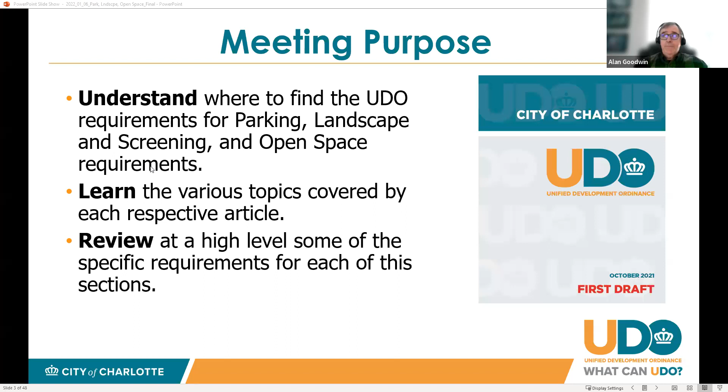So let's get right into the material now. We'll start out with parking. The parking requirements are found in Article 19 of the UDO. It's in Part 8, which is still part of the zoning standards section of the UDO. In Article 19, you'll find the various parking standards, and you can see a screenshot there of the table of contents of the UDO. This is where you'll be able to look and find what you're looking for, hopefully, in the entire UDO. Just start out with the table of contents right at the beginning.

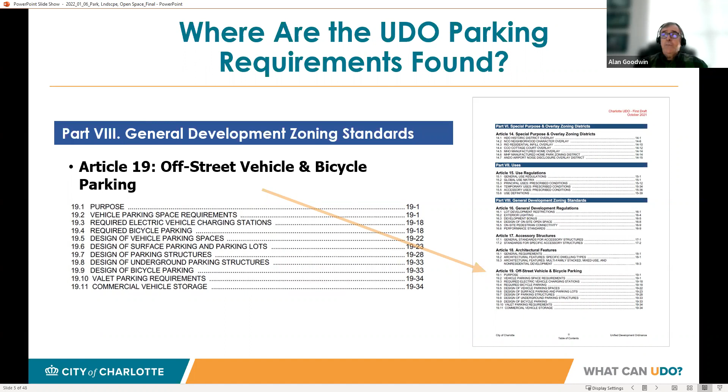So the parking requirements in the UDO are using a three-tier system that's based on zoning districts. Before we dig into that, I thought it would be helpful to just review what the proposed zoning districts are in the UDO. If you're not familiar with them, if you haven't been to any of our other meetings or conversations, this may be new to you. We have divided the proposed zoning districts into three general categories: neighborhood, employment, and centers, and they're each found in a different part of the UDO, either Part 3, Part 4, or Part 5.

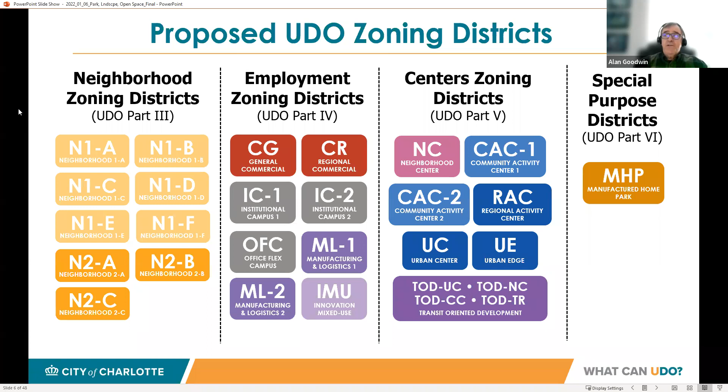They are Neighborhood 1 and Neighborhood 2 zoning districts, and then in the employment districts, there are commercial, campus, manufacturing and logistics, and innovation mixed use. And then our centers districts have neighborhood centers, community activity centers, regional centers, transit-oriented development, and then we also have a manufactured home park district. So that's just an overview.

Now, the parking requirements in the UDO, I mentioned we're using a three-tier system. This is something new for us, where according to zoning district, you would fall into either tier 1, tier 2, or tier 3. They are different, and we'll go over the differences and what's included in each of those three tiers in the upcoming slides.

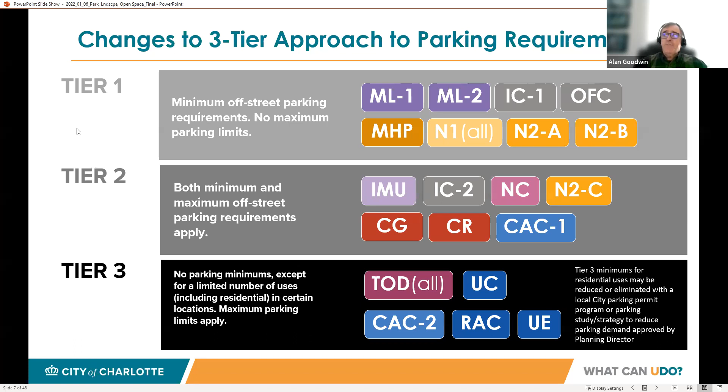So tier 1, which you can think of as our most auto-oriented, least walkable districts as a rule. The districts in here would be the manufacturing and logistics 1 and 2, the institutional campus 1, the office flex campus, the manufactured home park district, all of our neighborhood 1 districts, and our neighborhood 2A and 2B districts.

For these tier 1 districts, there will be a minimum parking requirement for off-street parking, but no parking maximums. And typically you can see what some of those minimum parking requirements would be. For example, for a single family home, it would be 2 spaces. For a manufactured home, it would be 1 per unit and so forth.

A typical non-residential minimum parking would be 1 space per 500 square feet of floor area of that use, but that's just a broad generality. Different uses would have different minimum parking requirements based on their nature. For example, some things like a car wash may not have a minimum parking requirement.

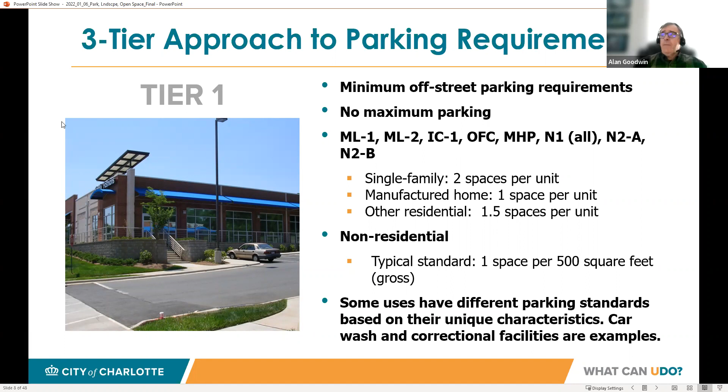Our tier 2 zoning districts would be the innovation mixed use, the institutional campus 2, neighborhood center, the neighborhood 2C district, our 2 commercial districts, and our community activity center 1. Tier 2 has both a minimum parking and a maximum parking standard.

Alan, I think we lost you. No, excuse me, I had to stifle a cough and get something to drink. No worries.

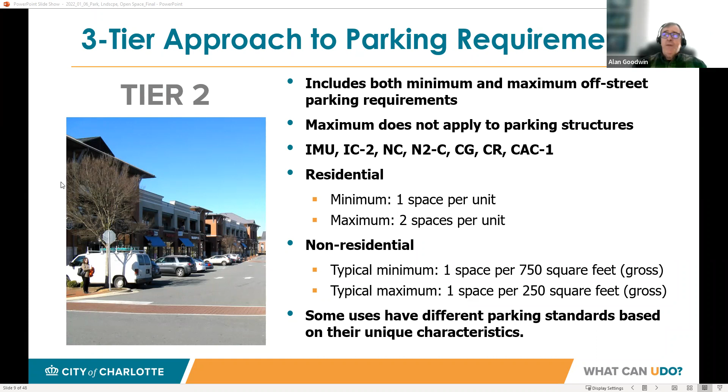So as I was saying, in the tier 2 districts, you would have both a minimum and a maximum requirement. And then finally in our tier 3, which tend to be our most urban and most walkable areas, the zoning districts in tier 3 are all of our transit-oriented development districts, our urban center, our urban edge, our community activity center 2 district, and the regional activity center.

And generally speaking, uses in the tier 3 districts will have no minimum parking requirements, but rather instead they will have maximum parking requirements. There is an exception to that. There would be minimum parking requirements for certain uses if you're within 200 feet of neighborhood 1 zoning.

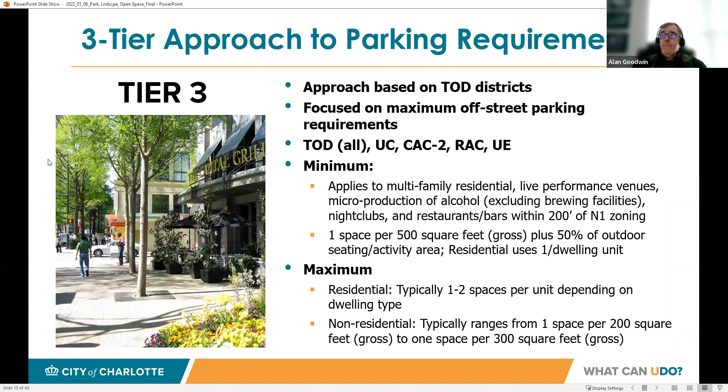And that would be things like multifamily residential or live performance venues, nightclubs, breweries, that kind of thing that are apt to generate parking demand in close proximity to lower density residential neighborhoods. Other standards in the parking are how parking spaces are calculated. It's based on the use, generally speaking.

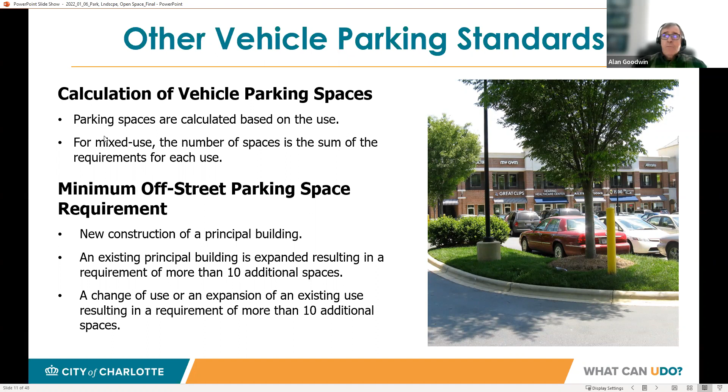And when minimum parking spaces are required, that is either with the new construction of a principal building, or if an existing building is expanded that requires more than 10 additional parking spaces, or a change of use resulting in a requirement for more than 10 additional parking spaces.

Some parking spaces are exempt from parking maximums, and these include any required ADA spaces, any electric vehicle EVSE installed spaces. We'll talk about EVSE in a minute. Pickup and drop off parking spaces for things like ride hailing services or deliveries. Any on-street parking spaces are exempt from the maximums. And then for townhomes and multifamily, you can have visitor parking spaces that may exceed the parking maximums.

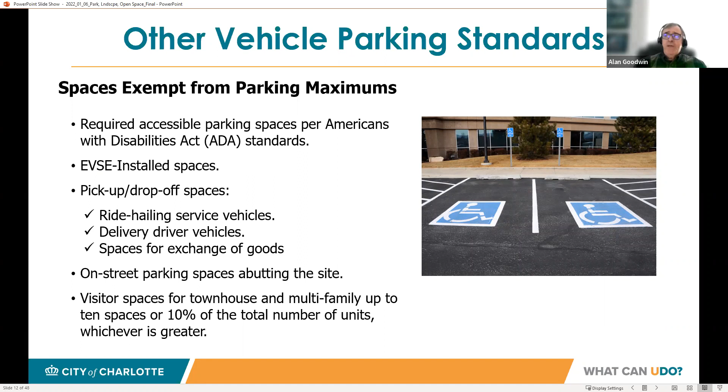So something new for the UDO is a requirement in some cases for electric vehicle charging stations. And there are 3 types of EV charging stations that are covered here. One is EV capable, which simply means that you make room in the electrical panel and you install a raceway from the panel out to where your future EV parking would be. The second level is EV ready, where you actually put a 240 volt outlet accessible to those parking spaces. And then the highest level is EVSE installed, which is the installation of an actual level 2 charging station.

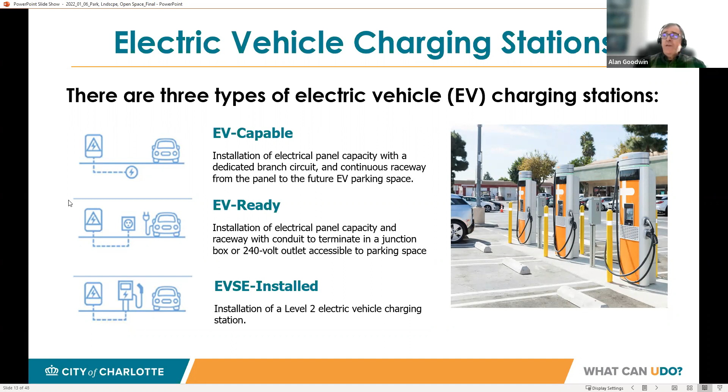So now that we understand what the 3 levels are, we do have requirements for EV charging for a limited number of uses. And these are any multifamily stacked dwellings, the residential part of a mixed use development, also for hotels, and for either parking lots or parking structures if they are the principal use. So these are the kinds of things that we think are going to generate the highest demand right now for some EV charging. And as I said, they don't count toward the parking maximums.

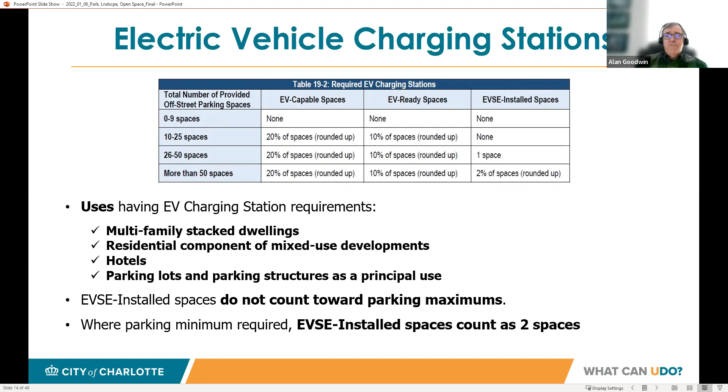And you can see the table on the slide, which is actually taken right from the UDO. Table 19-2 will tell you, based on the number of parking spaces provided, how many of those spaces, if any, are required to be either EV capable, EV ready, or EVSE installed. And as you can see, you don't trigger a requirement for an actual EVSE level 2 charger until you provide at least 26 parking spaces, in which case you have to provide one. And then as your parking gets bigger, you provide more of those EV chargers.

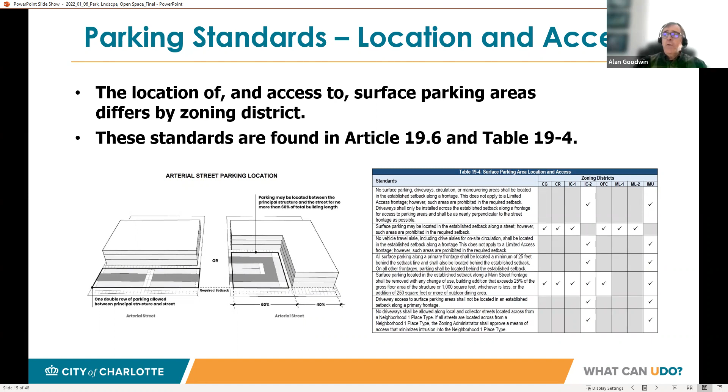You'll also find in the parking article, Article 19, standards for the location and access of surface parking. There's a table that is based on zoning districts, Table 19.4. There's a sample on the screen. It's quite detailed. I won't go into all of the details, but just to give you an overview of what's included in the parking article. So we're just going to go through that. We're not going to get too deeply into the standards.

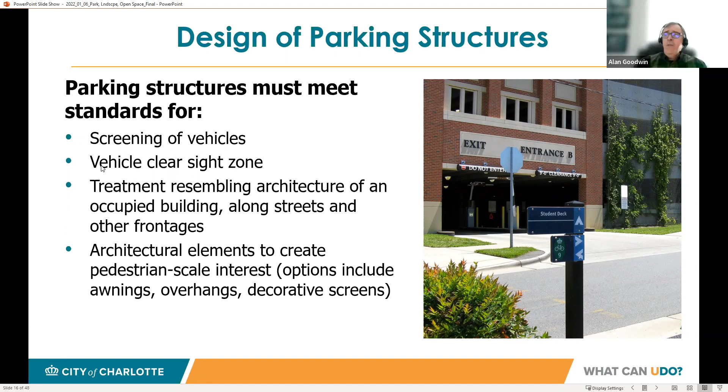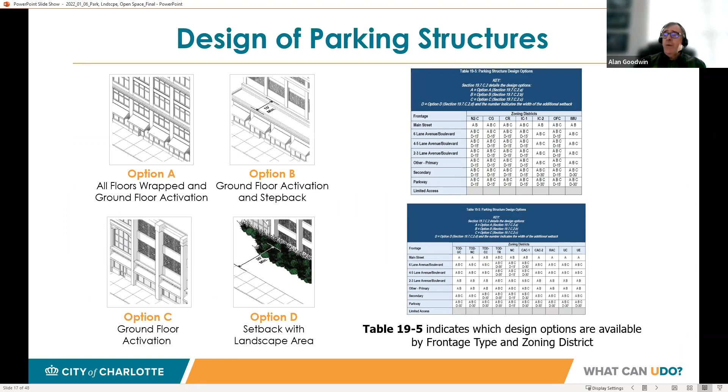You'll also find standards for the design of parking structures. And there are various options for the design of parking structures based on the frontage type, and we won't get too deeply into the frontage type, as well as the zoning district.

Article 19 also includes required bicycle parking, and bicycle parking, just like vehicle parking, may be required with new construction of a principal building or expansion or a change of use. And bike parking can be divided into either short-term or long-term bicycle parking. In most cases, there will be a requirement for both short-term and long-term. And there is also a minimum and in some cases a maximum requirement for the bicycle parking that is required.

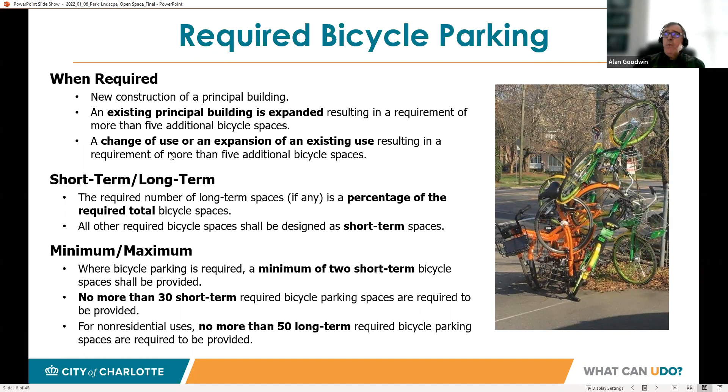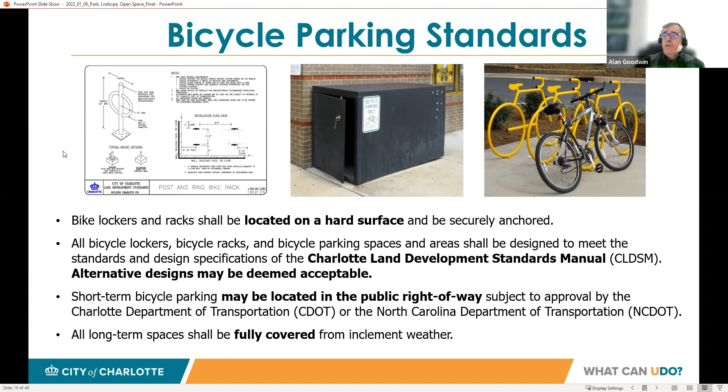And there is some flexibility for the design of bike racks. And the example on the right is a good example of that. It's not one of the city standards, but it was approved by the city for use. So there is some flexibility in the type that can be used.

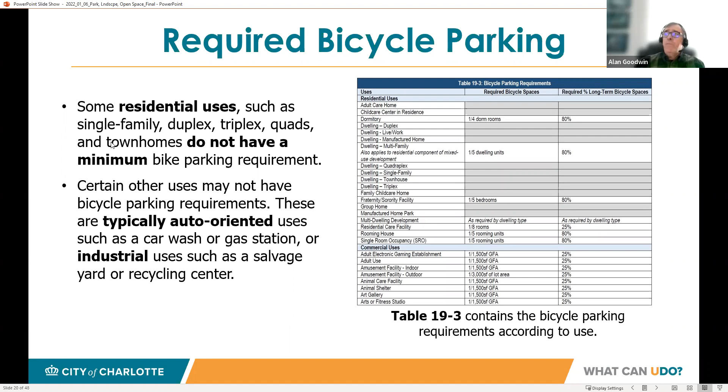And just as with the parking requirements for vehicles, there is a table that goes over the required bicycle parking according to the use. It is divided into the number of short-term and number of long-term. Usually the long-term bike parking requirement is expressed as a percentage of the overall required bike parking. So that is a quick overview of Article 19, the vehicle and bicycle parking requirements.

Our next topic is landscaping and screening, and you'll find that predominantly in Article 21 of the UDO. That's also in Part 8 of the General Development Zoning Standards. And you can see a little bit of what is in Article 21, a number of different topics. And we'll cover most of those as we go through the next several slides.

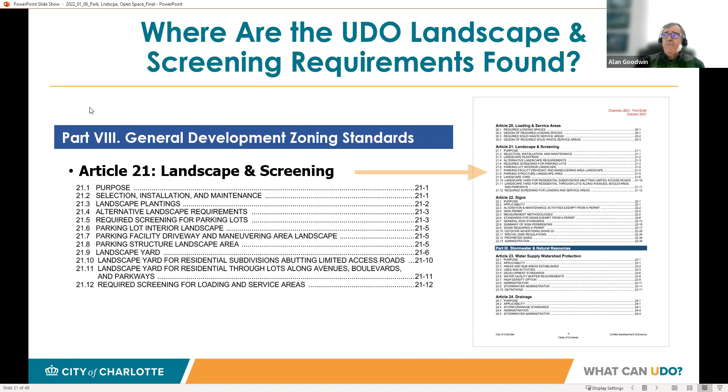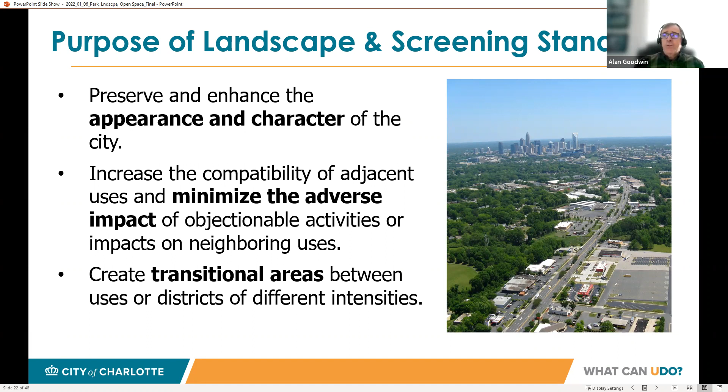But first of all, why do we have landscaping and screening standards? Well, we want to preserve and enhance the appearance and character of our city, but also increase the compatibility of adjacent uses and minimize any adverse impacts that some uses may have on neighboring uses, and then to create transitional areas between uses of different intensities.

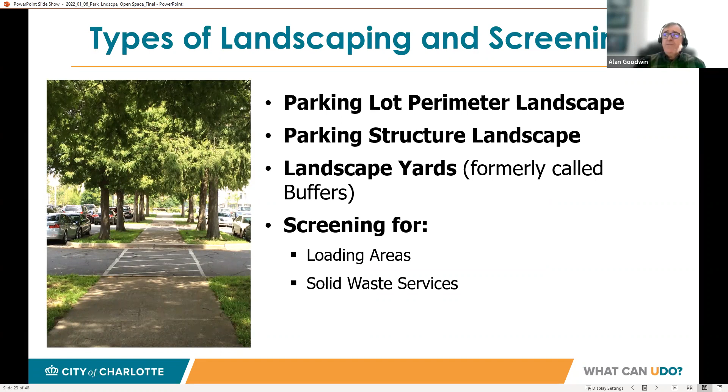So the types of landscaping and screening that's covered in Article 21 are parking lot perimeter landscaping, parking structure landscaping, landscape yards, which in our current zoning ordinance are called buffers. In the UDO, they're called landscape yards. And then screening for specifically loading areas and solid waste services.

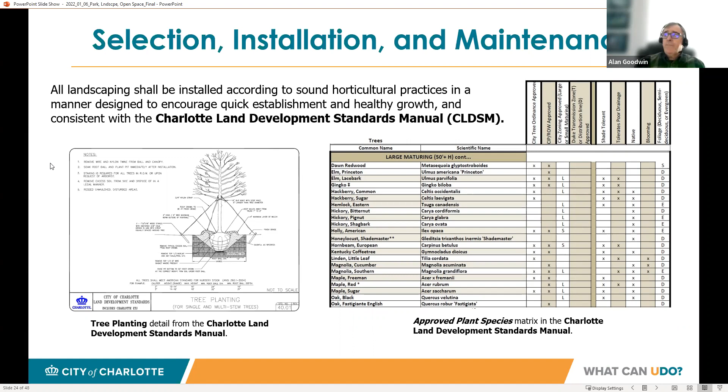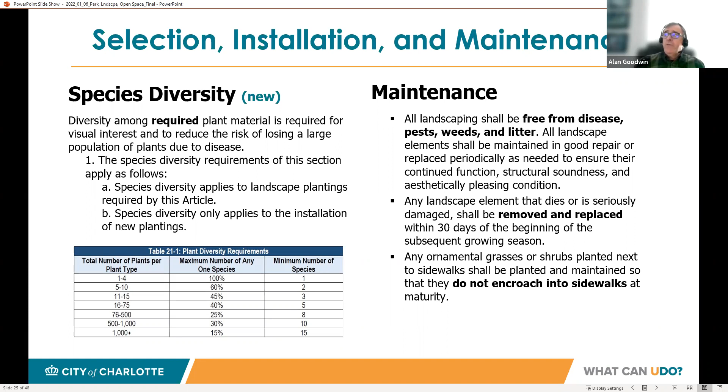Something new in the UDO is a requirement for species diversity of landscape plant material based on the number of plantings. There may be a requirement to create a diversity among plantings to reduce the risk of losing plants to disease, for example. So this is something new. You'll see that here. And there's also requirements for how to maintain required landscaping material, including removal and replacement of any landscape material that dies or is seriously damaged.

Parking lot perimeter landscaping: surface parking lots are required to be screened at the edge of the parking lot. And this screening is required for parking lots of 10 spaces or more, and also for any driveways or maneuvering areas that are located within the setbacks.

And it's required when a new principal building is constructed or parking spaces are added, 10 or more, or if at least 50% of that surface parking lot is reconstructed. Reconstructed doesn't necessarily mean just repaving or restriping, but actual regrading and reconstruction is how that is defined.

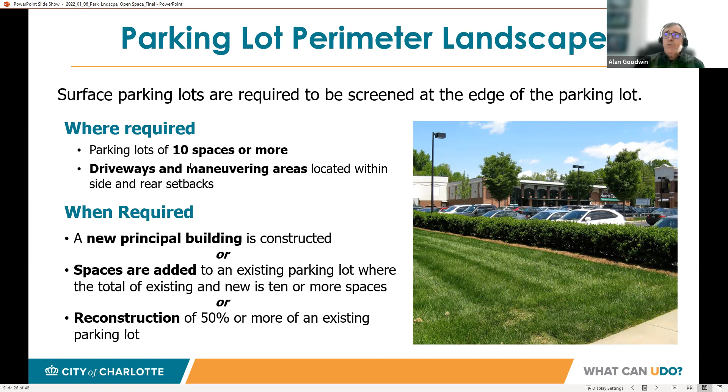There are exceptions for when you have to provide parking lot perimeter landscaping. If you've got shared parking between properties, for example, you're not required to screen the edge of that. If there's a landscape yard required, you may not be required to provide the parking lot screening.

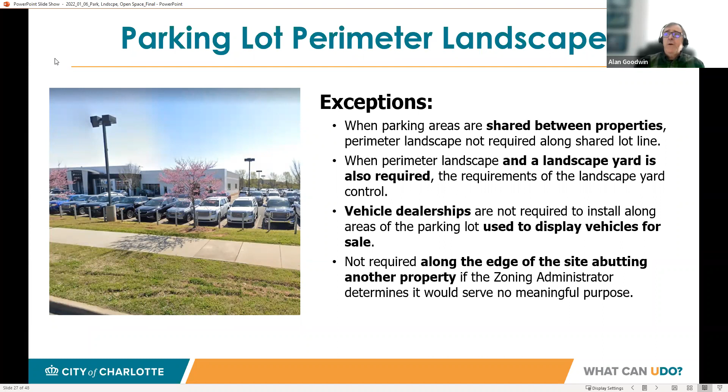Also for vehicle dealerships, for example, like the one on the screen, they are not required to screen the display parking areas of their dealership. Obviously, they want people to be able to see the kinds of cars that they're selling. And then also not required if the site abuts another property, if the zoning administrator determines there wouldn't be any meaningful purpose to have that screening there. So a way out for that.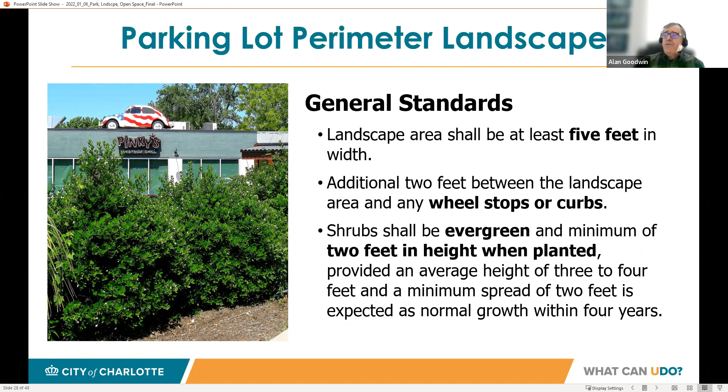Generally speaking, the parking lot landscape perimeter area has to be 5 feet wide, a little wider if there are wheel stops or curbs, with evergreen shrubs, and you can see some of the standards for the shrubs that are required. And there are a couple of options for screening parking lots. One is just using the landscape screening.

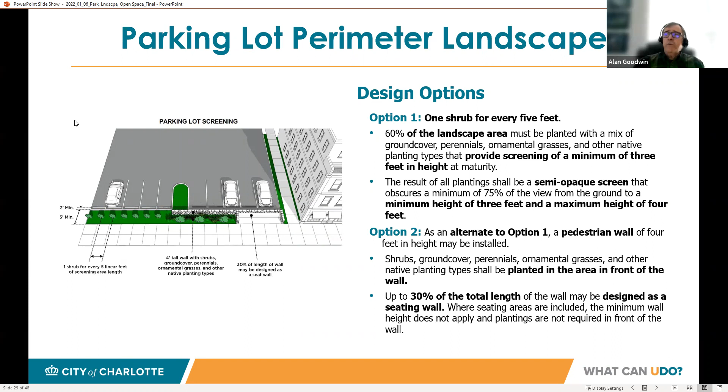Another is to use a shorter wall in addition to some small shrubs and ground cover. And you can also have part of that screen wall be a seating wall if that's what you want to do with that. So all of that is covered in Article 21 of the UDO.

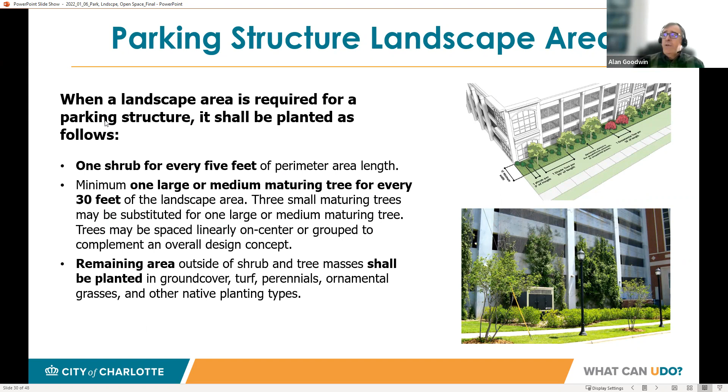There are also requirements for landscaping of parking structures. And you can see some examples there and some handy graphics in the UDO, and you'll find additional information. I'm not going to get into all the details of screening of parking structures, but obviously the goal is to soften the edge of those parking structures.

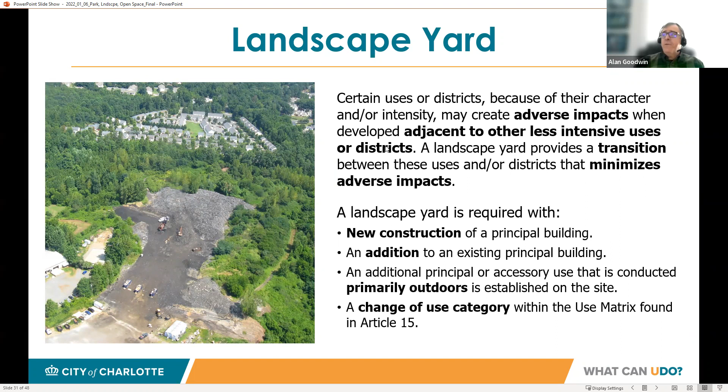And landscape yards. I mentioned earlier that these are currently called buffers in our zoning ordinance, but in the UDO, they will be called landscape yards. In certain uses or zoning districts, these may be required with the construction of a new building or the addition to a building. Possibly a new use that is primarily an outdoor use added to a site may trigger the requirement for a landscape yard, or a change of use category may also trigger a requirement for a landscape yard.

There are 3 different types of landscape yards in the UDO, A, B, and C. And these vary, and they will be determined. We'll see in I think the next slide how we can determine whether a site would require an A, B, or C.

But generally speaking, the A would be a wider landscape yard. And then the B is 25 feet wide and the C is only 10 feet wide. The width of the A depends on the size of the site. It could be anywhere from 40 feet all the way up to 100 feet wide for very large sites.

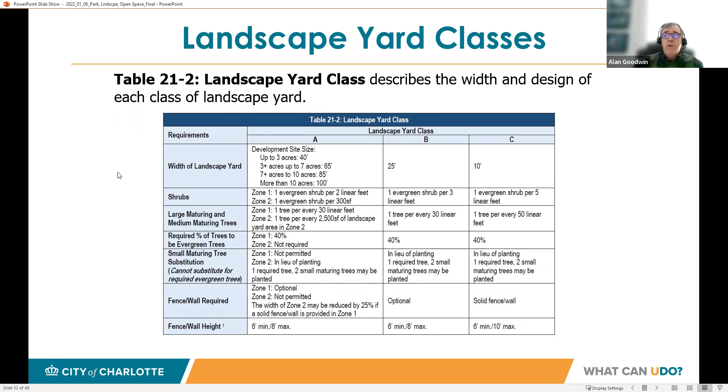So I mentioned that the Class A landscape yard is the widest of them, and it has 2 zones. An interior zone, which is the one closest to the perimeter of the site. That's zone 1, which is more heavily landscaped. And then zone 2 has a less intense landscape requirement.

I won't go all into that. That's covered in the ordinance, but there is a graphic that helps explain the difference between zone 1, which is 25 feet, and then zone 2, which is whatever the remainder of that Class A landscape yard would be.

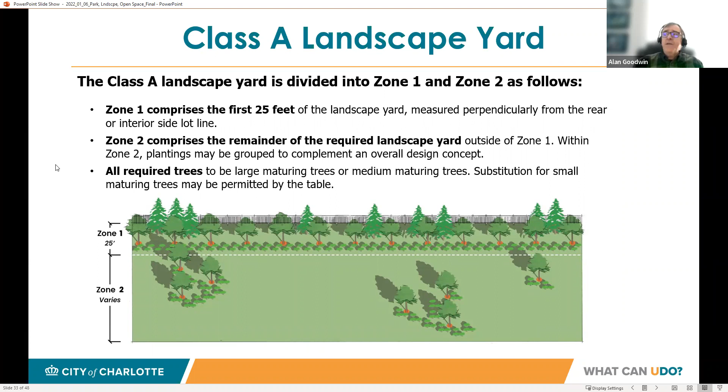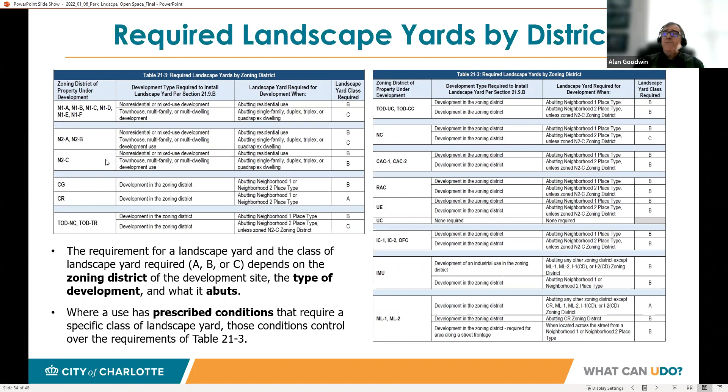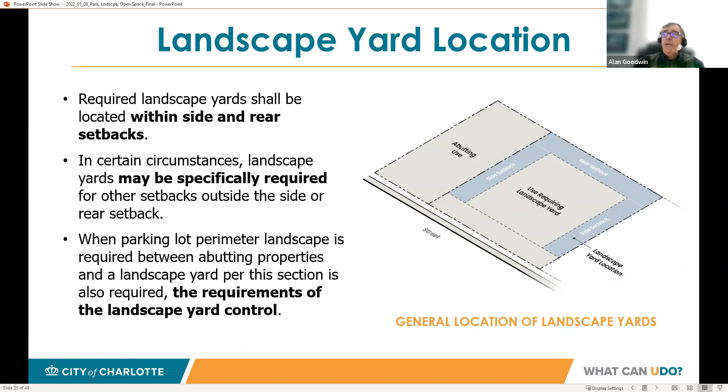Finally, some graphics—this is just an example you'll find in the UDO showing the general location of where the landscape yards are required.

So we'll move from landscaping into screening, which is also in Article 21 of the UDO, and specifically talk about the screening of loading areas first.

In all districts, except for our manufacturing and logistics districts 1 and 2, exterior loading areas need to be screened from streets and frontages and along any required side and rear setbacks with an opaque wall or 75% opaque wall or fence between 6 and 8 feet in height.

In those two manufacturing and logistics districts, which are kind of our equivalent to our existing industrial districts, exterior loading areas that are to the side or rear of buildings are not required to be screened.

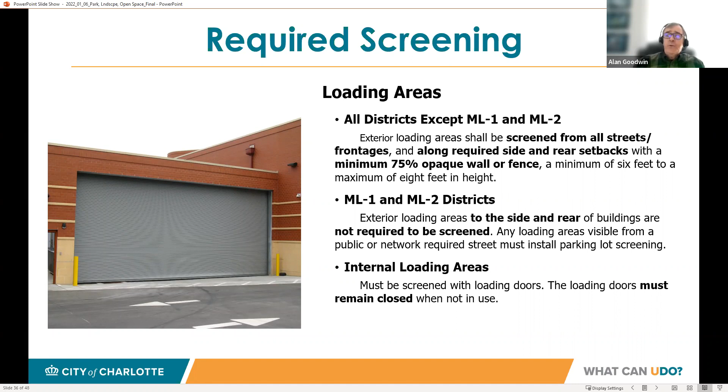But any loading areas visible from the public or network required streets have to install screening at a parking lot type of screening, which we've already talked about. Internal loading areas have got to be screened with a door, which must be closed when not in use.

The screening of large waste containers, dumpsters, and the like, recycling stations and solid waste service areas are also covered in this article. Generally speaking, this equipment has got to be screened.

With a 75% opaque fence, wall, or wall extension that should be a minimum of 1 foot above the height of the container, up to 2 feet above the height of the container being screened.

It has to be gated. The gate has to be either between 6 and 8 feet high, and must be a solid gate. You can see a photo example there of a screen that would meet, I think, these requirements.

And obviously the dumpsters or whatever is being screened in there need to be kept in those enclosures with the gate closed when not being serviced.

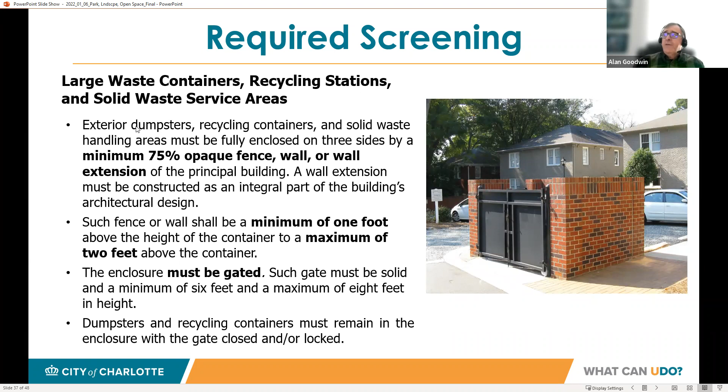The landscape article of the UDO does provide the zoning administrator with some flexibility to modify the landscape or screening requirements if the site has unusual topography or elevation, soil, or any other subsurface conditions that would prevent meeting the ordinance requirements.

If there are some alternative proposed requirements that meet the intent of either the landscape or screening, there is some flexibility for the zoning administrator to consider alternative solutions if the site doesn't permit meeting the requirements.

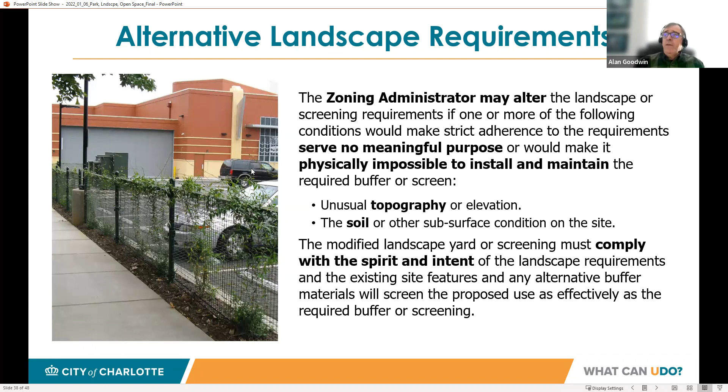Finally, our last topic is open space, and this is covered in several parts of the UDO. The design of open space is in Article 16.4, which is found in Part 8 of the General Development Zoning Standards of the UDO.

But the individual zoning districts may also have open space requirements, so you need to look in both places—in the zoning districts for the site you're developing or looking at, as well as Article 16.4, to learn about the required design of any required open space.

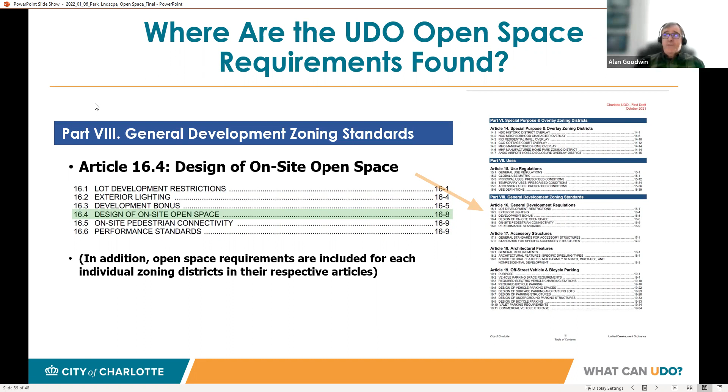So table 16.1—we'll have an example of that in a couple of slides. We'll talk about the design of open space, and there are three types: public open space, common open space, or private open space.

Just want to point out that things like driveways, sidewalks, parking areas, bike parking, mailboxes, and other things don't count toward the required on-site open space.

And there are some uses that are exempt from any open space requirements, and those would be anything in the open space, recreation, or agricultural use categories of the use matrix, as well as infrastructure uses or transportation uses.

So in order to figure that out, you need to go to Article 15, which covers uses and breaks down the various uses into broader categories. If your use is in one of those broader categories—open space, recreation, and so forth—it probably does not have an open space requirement.

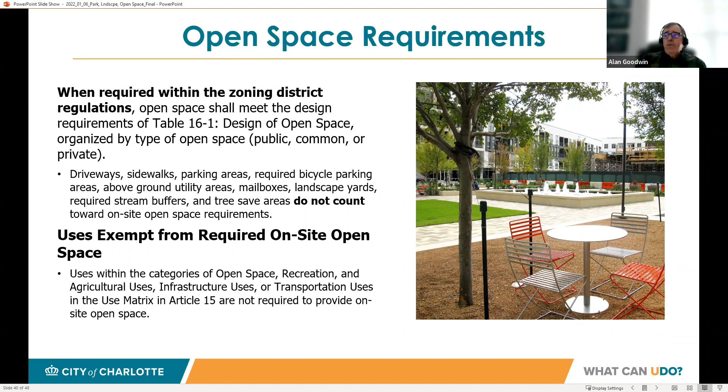The open space requirements are a little bit different for the neighborhood zoning districts and the other districts, so I've separated them into two different slides so you can see a little bit clearer what they may be. Generally speaking, open space is required for new development or expansion of a certain size of building.

In neighborhood zoning districts, any required open space can be private, common, or public, or any combination of those. For most of our neighborhood 1 districts, N1A through N1E, we don't have an open space requirement for single family, duplex, triplex, or quadruplex dwellings, nor for multifamily or townhouse, because those uses generally aren't permitted in those districts.

But in the N1F district, where multifamily and townhouse are permitted, there's a requirement for multifamily stacked, which is a percentage of the lot area. For multifamily attached or townhouse, the open space requirement is based on the number of units and a certain square feet per unit—in N1F, it's 250 square feet per unit.

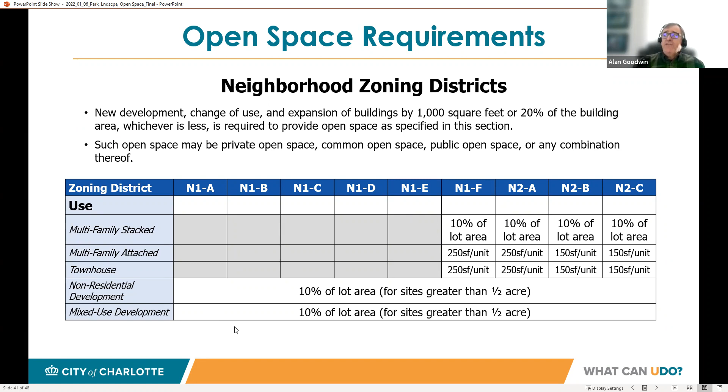In our employment and center zoning districts, open space is handled a little differently. It's triggered by new development, a change of use, or expansion, and doesn't apply to smaller sites of half an acre or less. For each zoning district shown across the top, the next line down shows the total on-site open space required.

Taking the first column as an example, our two commercial districts, CG and CR, require setting aside 5% of the site as open space. Of that, 50% has to be public open space if you're doing commercial development.

As you go down the table, depending on the development type—commercial, mixed use, or campus development in campus districts—those numbers, the 50s and 25s, represent a percent of the total required open space that has to be public for each development type. Generally speaking, the open space requirement is 10% of the total lot area, with some exceptions, but generally it's 10%. And generally, for commercial development in those districts, 50% of that 10% has to be public open space.

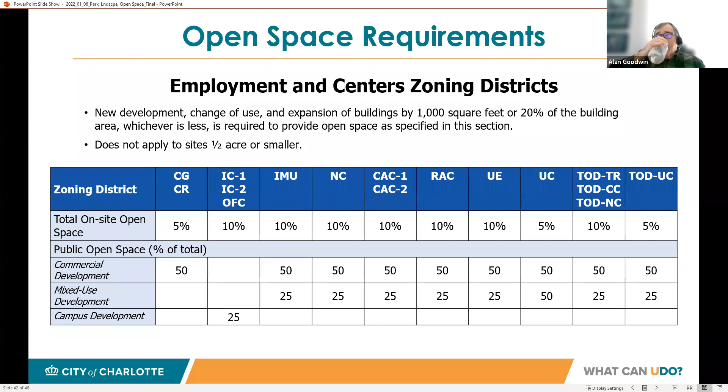There is increased flexibility in the UDO for the design of open space compared to our current ordinance, depending on whether it's public, common, or private. For example, in any of those three types, the required open space can be located on decks, galleries, porches, terraces, patios, or rooftops—that's something new. For private open space in multifamily and townhouse dwellings, it doesn't have to be in a yard per se, but could also be on a balcony, porch, or deck.

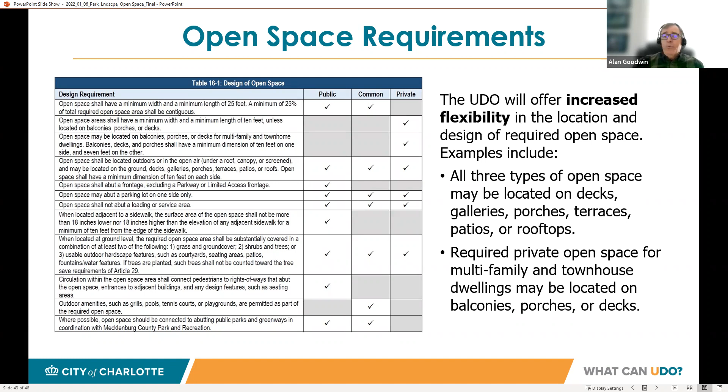That concludes the material part of the presentation.

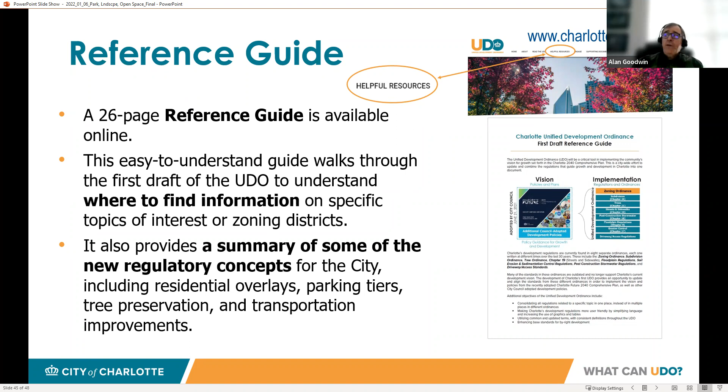Just to cover where we are, we released the first draft of the UDO on October 7th. We're currently receiving feedback from the community and going through community engagement activities, such as today's virtual conversation. We've had both virtual and in-person meetings in the past several months and weeks. We'll be accepting comments on this first draft until January 14th, although we're currently talking about possibly altering the schedule to provide a bit more time, more to come on that. If you haven't signed up for updates, I urge you to do that on our website so you'll be sure to get new information when we push it out.

We're getting toward the end of our virtual conversation series, currently on the 10th of the 12 that we've scheduled. I want to point out that the frequent users Q&A session scheduled for this past Tuesday has been rescheduled for January 27th. We'll be doing this same conversation again this evening at 6 o'clock, covering the same material. Next Tuesday, we'll have a virtual conversation covering required new streets, improvements, and associated standards.

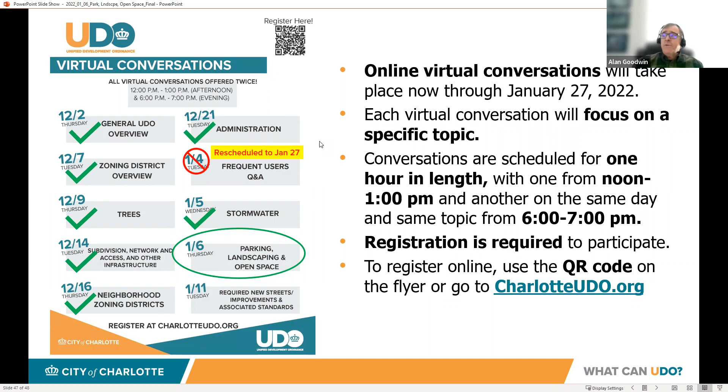As you know, you do need to register for these virtual conversations ahead of time. You can do it right up until the minute before the conversation starts to get the Zoom link to join and participate. So I'd like to thank you all.